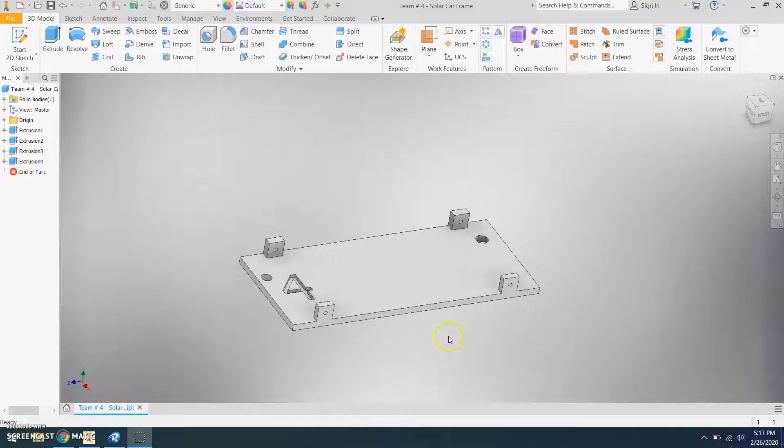In this video, I'm going to show you how to finish off your solar car frame. I'm going to look at this from above and do a sketch. I think we only have two left. I'm going to put the slot that the motor is going to slide upon. This is actually pretty important.

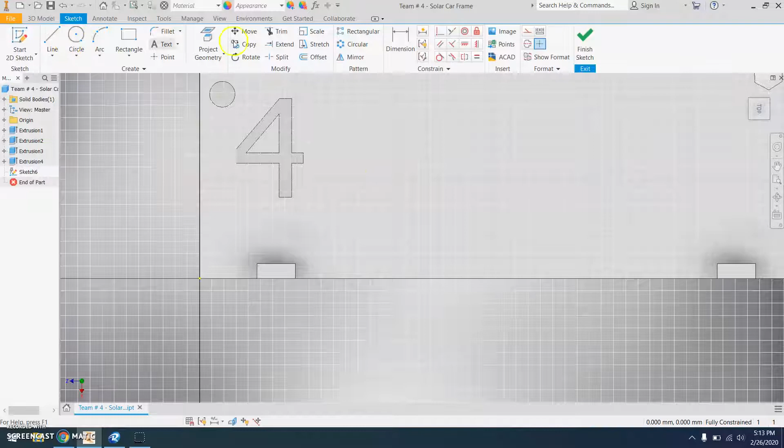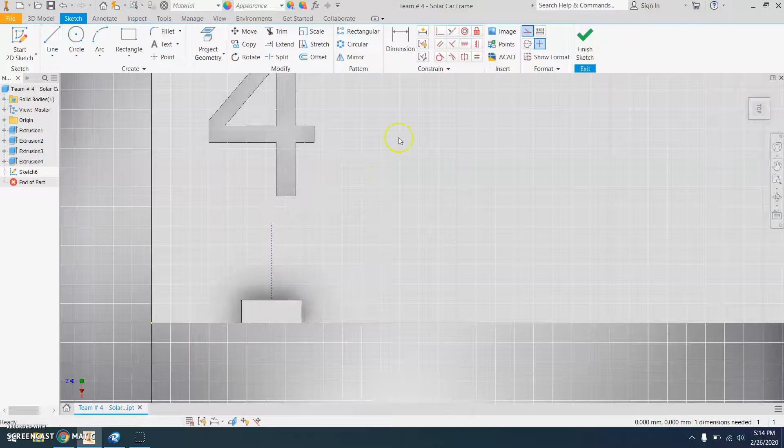We're going to hit the construction line symbol and draw a construction line and snap. See how this is snapping? That green dot means it's in the center, so center of the axle. You don't have to draw this out very far. Hit escape and then remember to turn off this. See how it's deselected now?

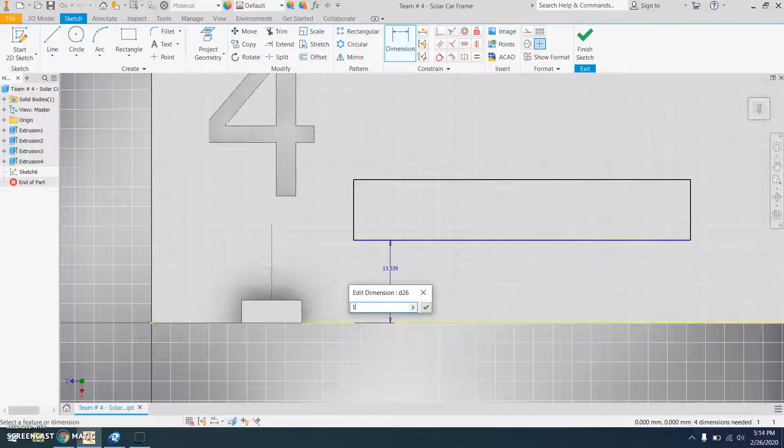I'm going to draw a rectangle, approximate location. Now I would definitely use these numbers because I know these work and the drivetrain will line up. If you use different numbers, I can't guarantee that this is going to line up or that your slot will be big enough for this motor to tighten properly, for that belt to tighten properly. So if you're using inches, make sure that you're putting mm each time here. I've got the slot where it's the right width, the right distance from the edge.

I'm assuming this is where your axle pulley is going to be. This is the driven wheel, it will have a pulley here. If this is not the right one, then you should have done this on a different corner.

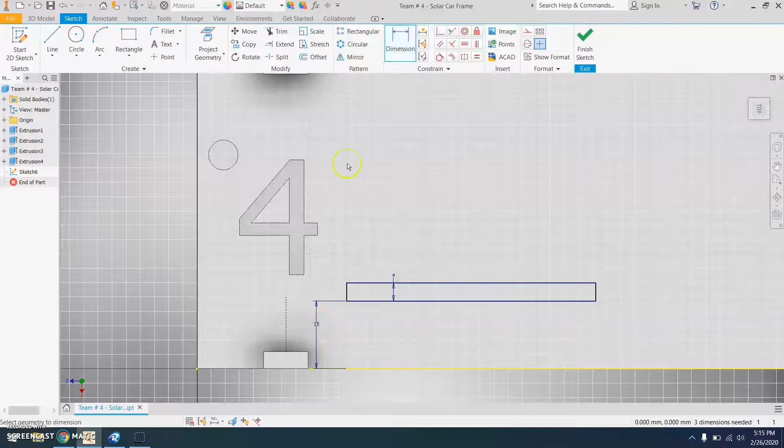So you're going to dimension from here. I would use this number because I know for a fact that this gives the motor enough room to slide to tension the belt. You could make this actually longer, that wouldn't hurt anything, but at a minimum it needs to go to here. It'd actually be a good thing to make it longer because it lightens your car up.

So then what I'm going to do is dimension the other end of this. You definitely, I don't know why it did that to me, dimension from, you got to make sure you hit that line.

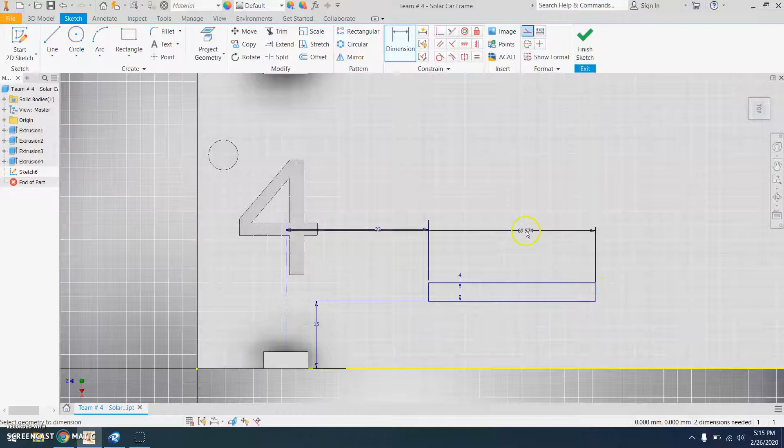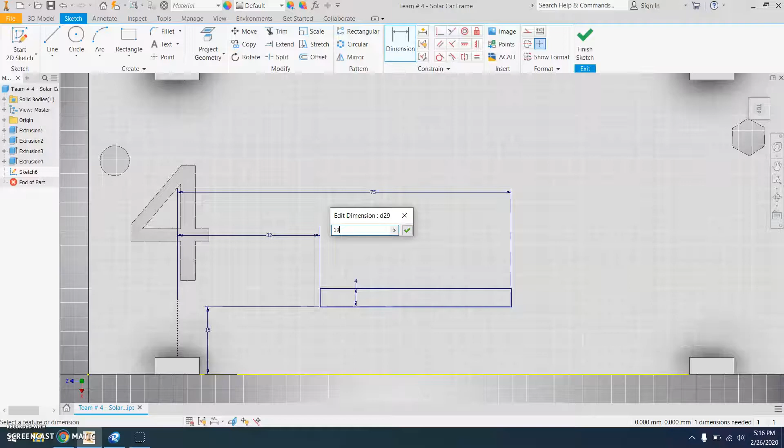You definitely want at least 75 millimeters here, at least that, but it doesn't hurt to go longer on these. If you can't get this to fit, then there's no way you're going to be able to tension it correctly. So I would just go as far as possible with this thing. Once we see that we definitely got enough room, then it doesn't hurt to do something like this, it actually will lighten the car.

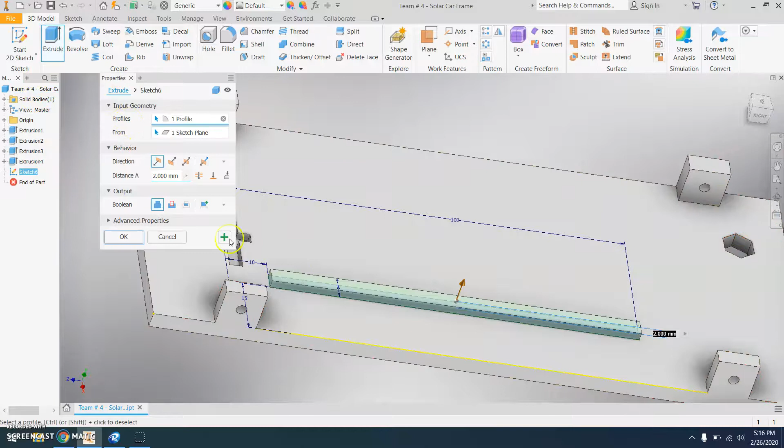So this should line up in this scenario here. I'm then going to use extrude, I'm going to use a cut, and then make sure it goes all the way through, which it didn't. You can put a number on there or do the click and drag. I always like doing the click and drag personally. Hit OK.

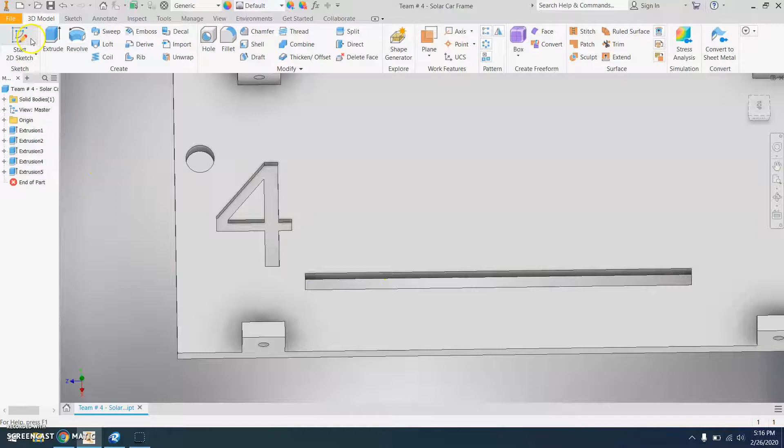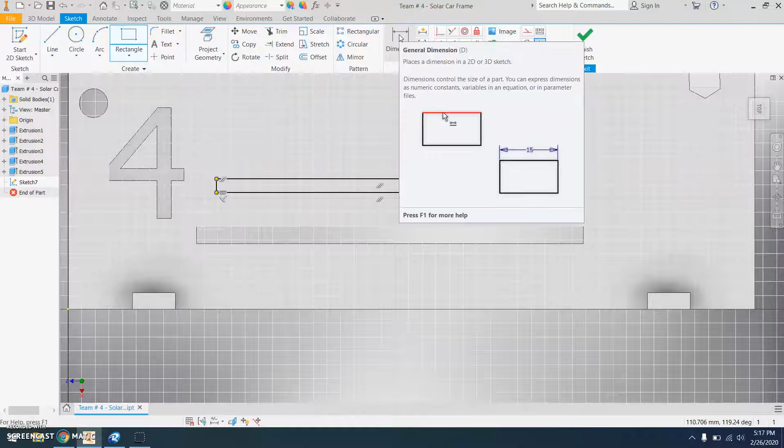One last thing, you do not have to put this, but it makes this much easier to assemble, is to put a wall up along here so the motor can't rotate. If you notice when you tighten my car, it rotates all over the place and it's very frustrating. If you put a wall in this area, just a little wall, then it can't rotate on you, which makes your life a lot easier.

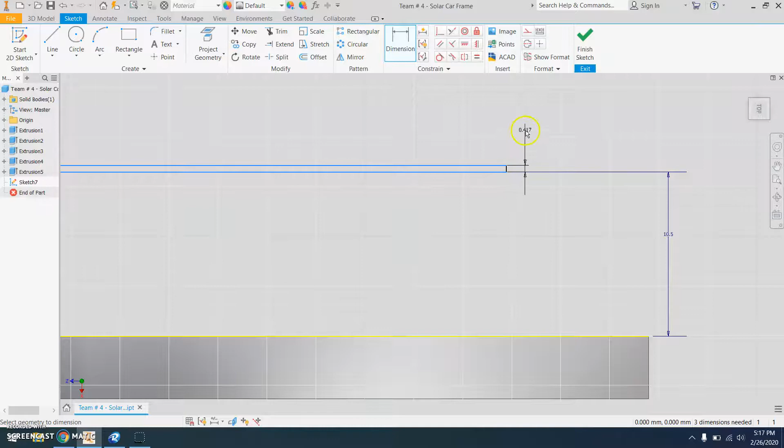You're going to want to use the numbers that I use here. I would make this at least like 10.5 to give it a little room for any error. And then this is up to you, but I always feel like 2 millimeters is a good number for things not to break. Now notice this is definitely long enough because the motor is probably going to sit here all the way to like here, so there's no way it's going to rotate.

And then it's up to you how much you want to extrude this by. I keep doing 2 millimeters, it just needs to catch on there. Maybe do 4 because I know it'll definitely catch on there if you do 4. Hit OK.

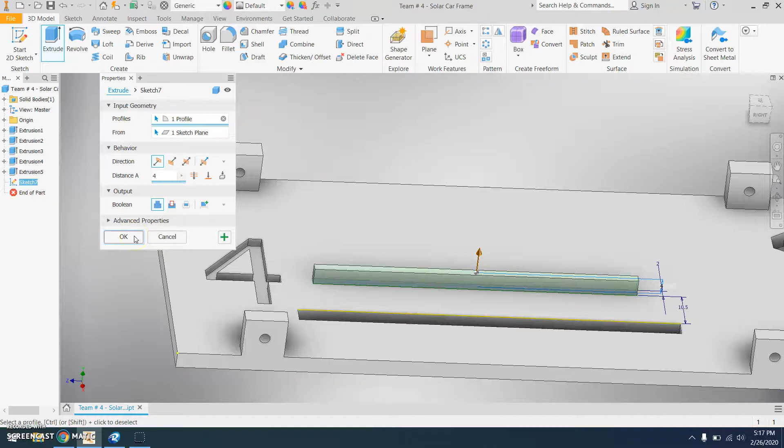And then let's color this in. I like when the number is colored in because it's easier to see when checking these.

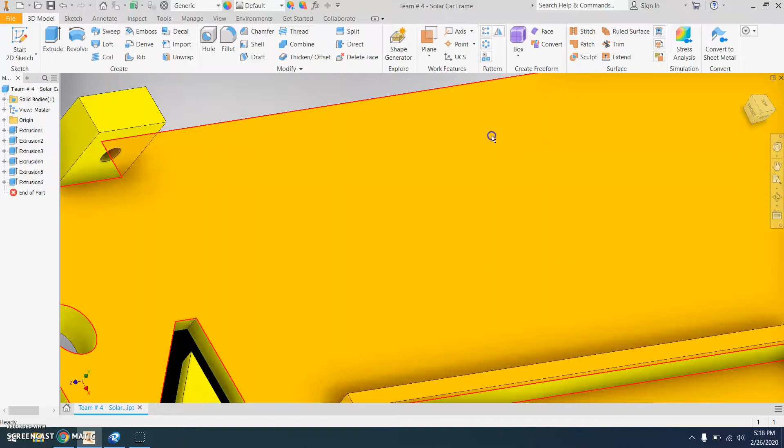So your frame should be done at this point, but I think you should do a lot more cuts in here. Some of you guys have much different shapes, so you'd use the line tool. Make sure you hit the save button. Let me know if you have any additional questions.